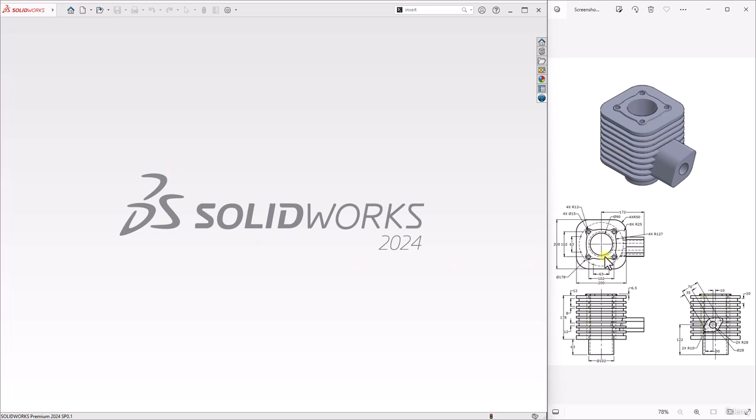So let's start. Double click on the screen. The Welcome SolidWorks window will appear. Now choose the Part button.

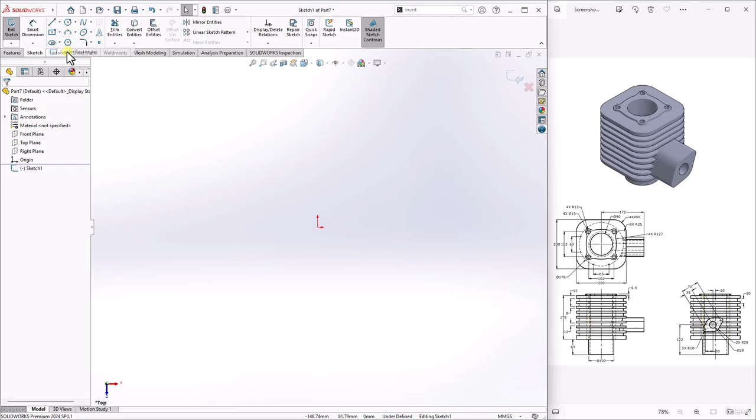Now go to the Features Command Manager and select the Extruded Boss Base button and select the top plane as the sketching plane. From the Sketch Command Manager, go to the Rectangle drop down and select the center rectangle. Click on the origin and create one rectangle.

Now choose the Smart Dimension and dimension the rectangle. Click here and put the value 200. Click here and put the value 200. Now choose the OK button.

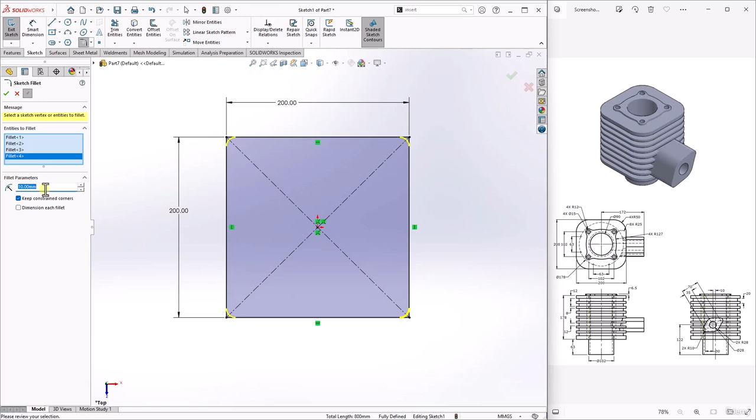Now select the fillet button. Entities to fillet, select here. Click here and here, click here and here, click here and here, click here and here. In the fillet parameters, put the value 50 and choose the OK button.

Now our sketch is fully defined. Choose the OK button. Now exit from the sketch environment by clicking on the confirmation corner. The Boss Extrude Property Manager is displayed.

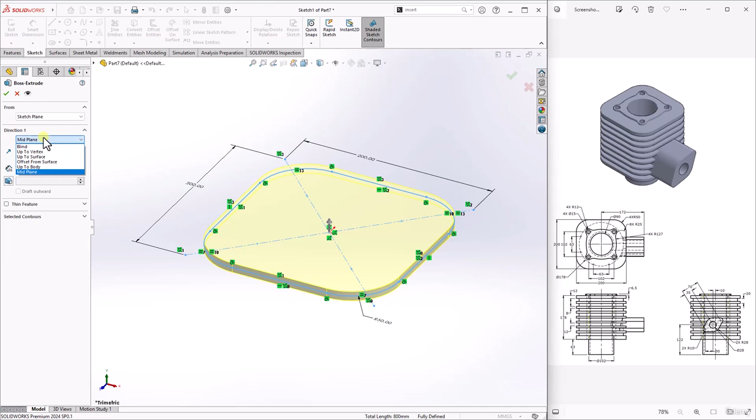From the direction 1 rollout, the end condition will be blind, and in the depth spinner put the value 114. Click here. In direction 2, the end condition will be blind, and in the depth spinner put the value 64. Now choose the OK button.

Now creating the second feature of the model, from the Features Command Manager, select the Extruded Cut button and select the top planar face of the model. Click here.

From the Sketch Command Manager, go to the Circle drop down and select the Circle button. Click on the origin and create one circle. Now select the Smart Dimension, dimension the circle, put the value 90 and choose the OK button. Now exit from the sketch environment, click here.

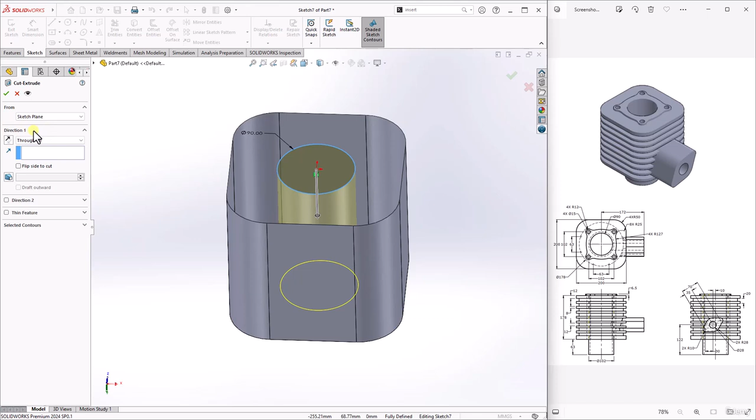Change the orientation of the model. The Cut Extrude Property Manager is displayed. From the direction 1 rollout, the end condition will be through all. And choose the OK button.

Now creating the second feature of the model. From the Features Command Manager, select the Extruded Boss Base button and select the bottom planar face of the model. Click here. Now select the circle and choose the Convert Entities button.

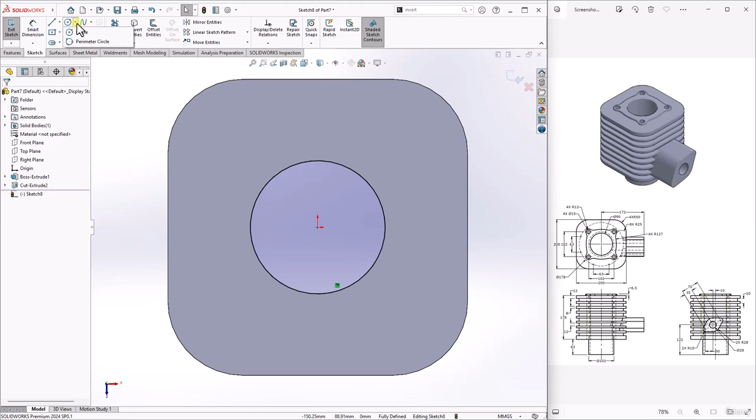Now create one more circle. Go to the Circle drop down and select the circle. Click on the origin and create one more circle. Now we will dimension it. Click on Smart Dimension, dimension the circle, put the value 102 and choose the OK button.

Now exit from the sketch environment. Click here. The Boss Extrude Property Manager is displayed. From the direction 1 rollout, the end condition will be blind, and in the distance spinner put the value 63 and enter. Change the orientation of the model and choose the OK button.

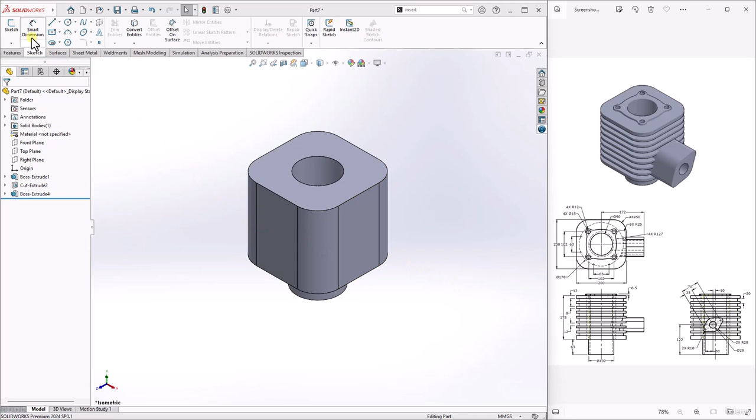The next feature of the model is the Revolve Cut feature. First we have to create a sketch and then we will revolve it. From the Sketch Command Manager, select the Sketch button, expand the Feature Manager design tree and select the front plane. Now we will create the sketch.

Go to the line drop down and select the center line. Click on the origin and create one center line over here. Now go to the rectangle drop down and select the center rectangle. Create one rectangle over here.

Now we will dimension it. Choose the Smart Dimension button. Click here and the center line, now put the value 178. Click here and put the value 38. Click here and put the value 12. Click on this line and here and put the value 12 and choose the OK button.

Now our sketch is fully defined. Now exit from here. Click here.

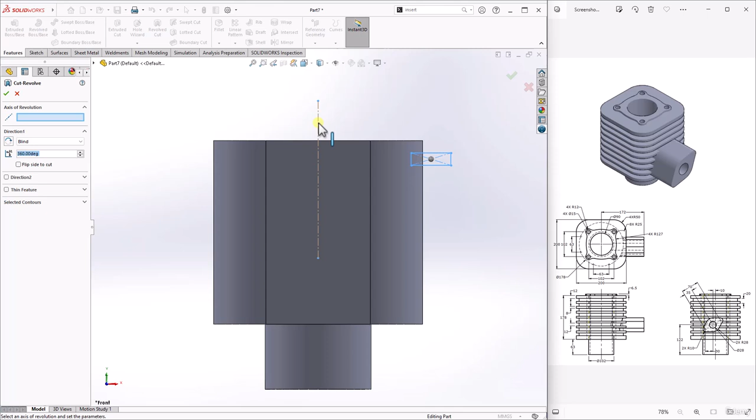Now go to the Feature Manager design tree and select the Revolve Cut button. The Cut Revolve Property Manager is displayed. For the axis of revolution, click here and select the center line which we have created, and choose the OK button.

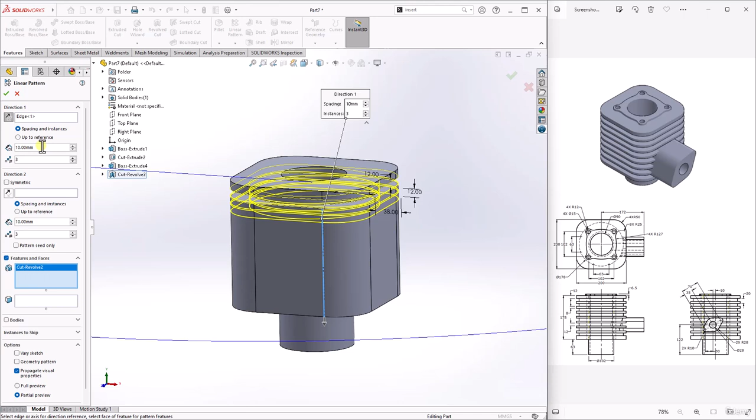Next, we will create the linear pattern of the previously created revolve cut feature by using the linear pattern tool. From the Features Command Manager, go to the linear pattern dropdown and select linear pattern. In direction 1, click here. For features and faces, click here, expand the Feature Manager design tree and select the cut revolve. In the spacing put the value 20 and number of instances put the value 8. Now choose the OK button.

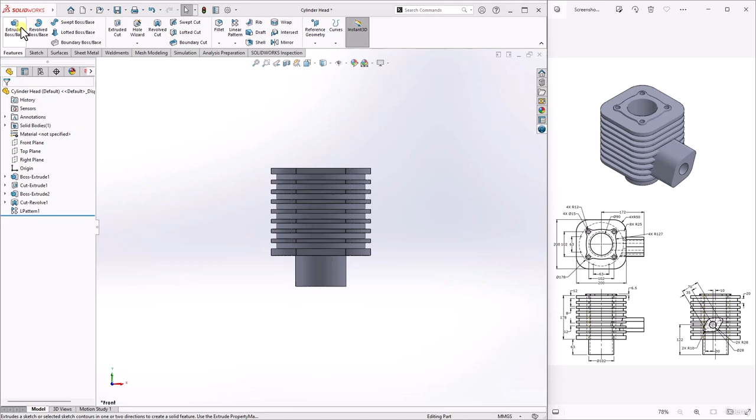Now creating the next feature of the model. The next feature is an extrude feature. To create this extrude feature, we have to invoke the sketching environment by selecting the top planar face of the model. From the features command manager, select the extruded boss base button and select the top planar face of the model. Click here. Now we will create the sketch.

From the sketch command manager, go to the line drop down and select the center line. Click on the origin and create one horizontal and one vertical line.

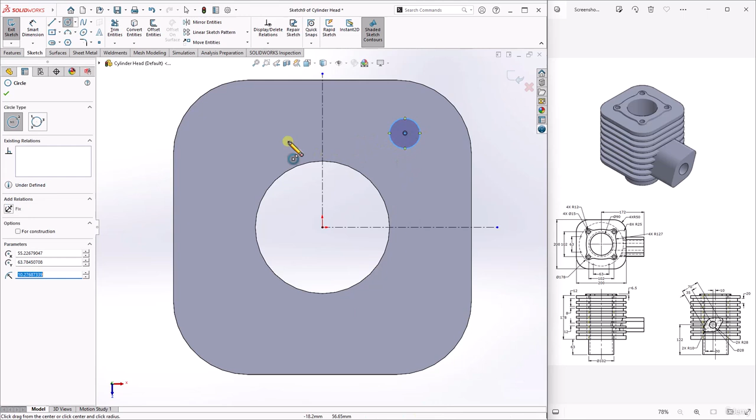Now go to the circle drop down and select the circle and create one circle over here. Now go to smart dimension, click on the center point of the circle and the center line and put the value 102. Now click on the center point of the circle and the center line and put the value 102. Now dimension the circle, click on the circle and put the value 24 and choose the OK button.

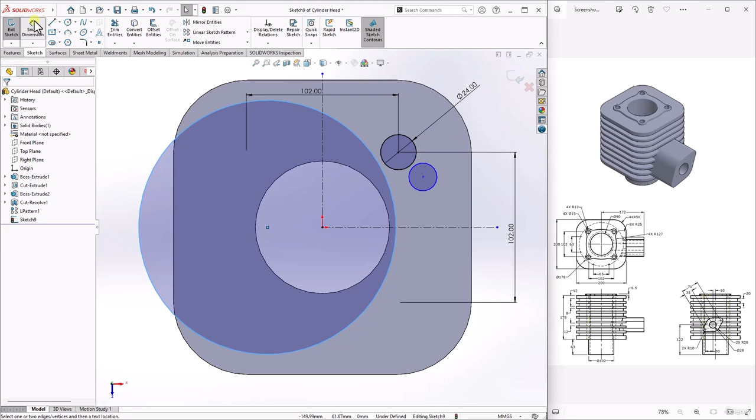Again go to circle drop down, click on circle and create one circle over here and create one circle over here. Now go to smart dimension, click on the center point of the circle and the center line and put the value 63. Now click on the circle and put the value 50.

Now go to display and delete relations drop down and select add relation. In the selected entities, select the circle and this circle and give a relation tangent and choose the OK button. Again go to display and delete relations drop down, select add relation. In the selected entities, select this circle and this circle and give a relation tangent.

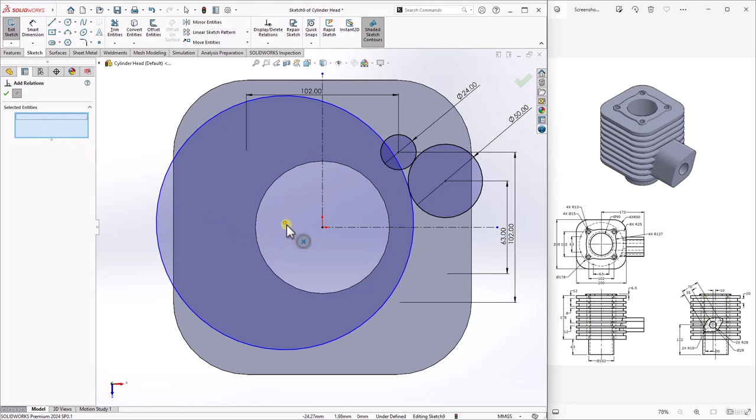Again go to display and delete relations drop down, go to add relation. In the selected entities, select the center point of the circle and the origin and give a relation horizontal and choose the OK button. Now go to mirror entities, click here. In the entities to mirror, select this circle and this circle and in mirror about, select the center line. Now choose the OK button.

Now go to trim entities, trim here, trim here, trim here, trim here, trim and trim. Now choose the OK button.

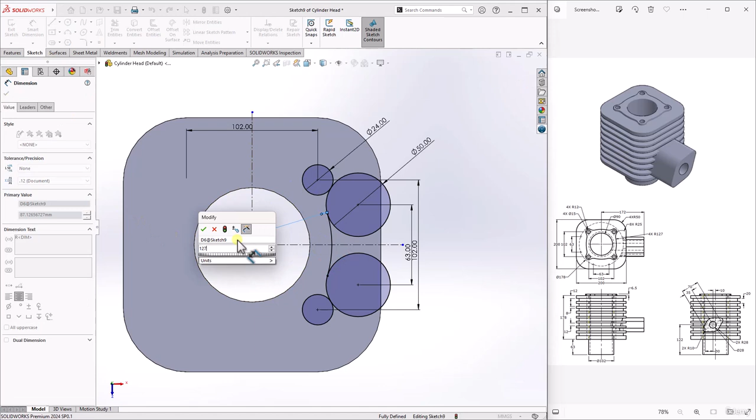Now go to smart dimension, click on this arc. Now put the value 127 and choose the OK button. Now go to trim entities, trim here, trim here. Now choose the OK button.

Now go to mirror entities, entities to mirror, select the sketch which we have created, click here and here, and in the mirror about, select the center line. Now choose the OK button.

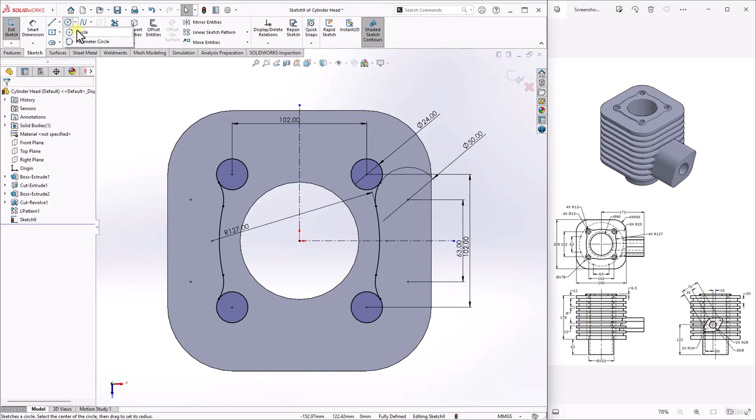From the sketch command manager, again go to circle drop down, click on circle and create one circle over here and here. Now go to smart dimension, click on the center point of the circle and the center line and put the value 63. Now dimension the circle, put the value 50 and choose the OK button.

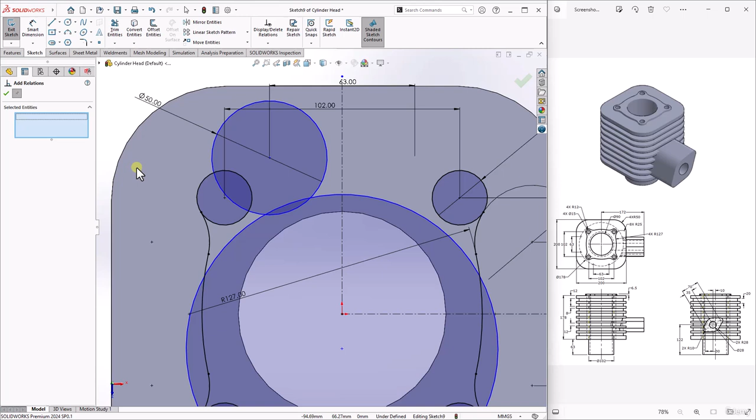Now go to display and delete relations drop down, go to add relation. In the selected entities, select this circle and this circle and give a relation tangent. Now choose the OK button. Again go to display and delete relations drop down, go to add relation. In the selected entities, select this circle and this circle and give a relation tangent. Now choose the OK button.

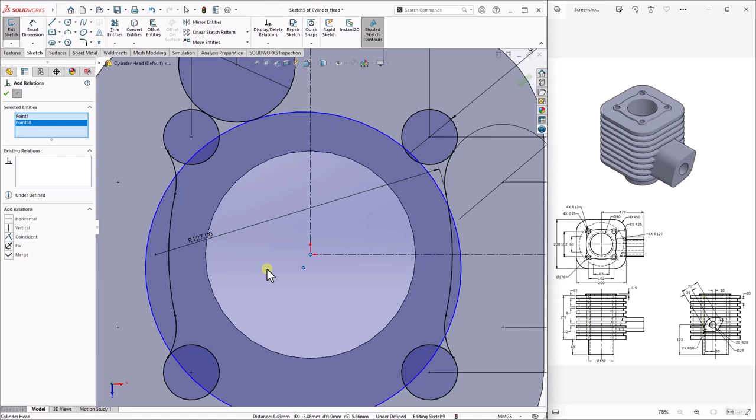Go to display and delete relations drop down, go to add relation. In the selected entities, select the origin and the center point of the circle and give a relation vertical. Now choose the OK button. Now go to mirror entities. In the entities to mirror, select the circle and mirror about, select the center line. Now choose the OK button.

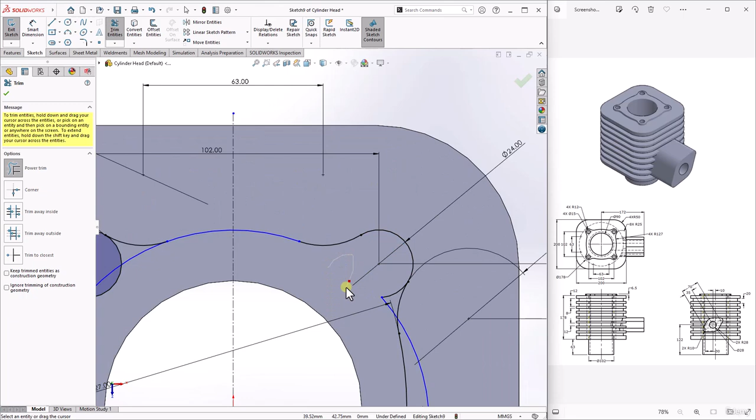Now go to trim entities, trim here, trim here, trim here, trim here, and trim here.

Now go to smart dimension, dimension the arc and put the value 127 and enter. Now choose the OK button. Now go to mirror entities, entities to mirror, select this arc and mirror about, select the center line. Now choose the OK button.

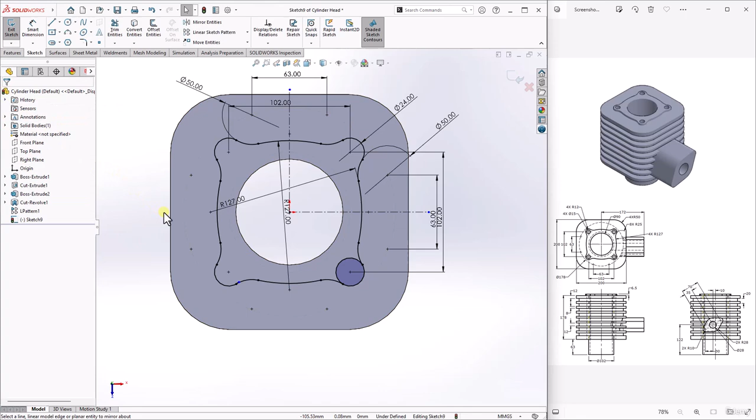Now go to trim entities, zoom here, trim here and trim here. Now choose the OK button. Now select the internal circle, click here and click on convert entities. Now exit from the sketch environment by clicking on the confirmation corner, click here.

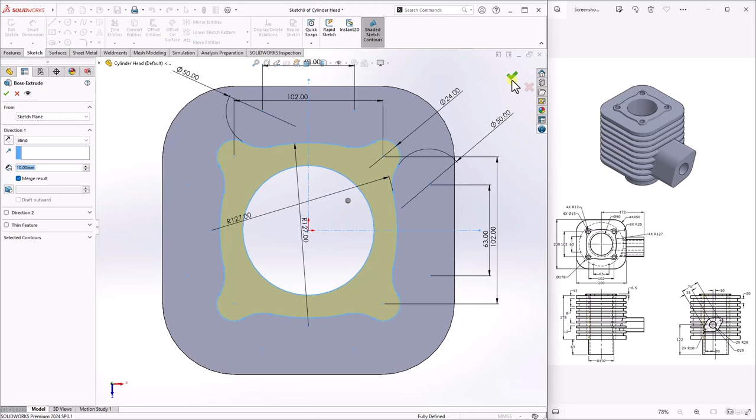The Boss Extrude Property Manager is displayed. Now change the orientation of the model. From direction 1, the end condition will be blind and in the depth spinner, put the value 6.5 and enter and choose the OK button.